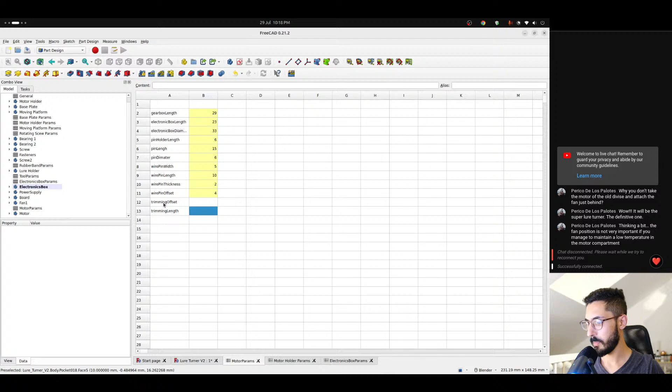So yeah, I was talking about that trimming at around 5.4 mil, and I think somewhere here we have a trimming length of 12. So we need to add this to our motor params. Let's call this trimming offset and trimming length. Trimming length is right here, it's 12, and the trimming offset is going to be 5.4 mil. So this is our offset, and that's our trimming length.

Cool, and now we need to go back to our motor, make it active. And we need a datum plane somewhere. Probably we'll start from here. Yeah, I think we're gonna do just that. So we have a datum plane here. We're gonna create a new plane, attach it to it, and in the Z direction, we need to go by pin length. Cool.

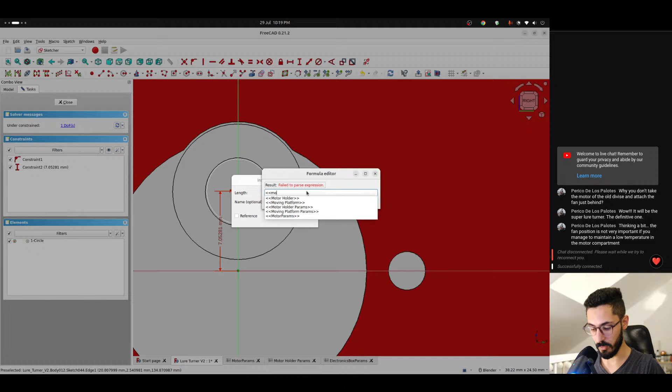Cool, and now we can create sketch here, go to section view, and let's do that trimming. So let's assume we have a circle here. We can just redraw the original pin. This was called motor holder params.pin offset. And this was motor params.pin diameter. Okay, and now I'm gonna set this as construction geometry.

Pex Peppers asks, how does FreeCAD compare to, say, Fusion 360 in terms of ease of use?

At the moment, it's not easy to use compared to Fusion 360. So yeah, if you put the time and effort to learn it, you could do stuff. I mean, I'm doing stuff with it, no problem. But they're working on version 1 that should be released soon. They don't have a release date yet, but if you go to FreeCAD, what was it called, releases or something? Oh come on.

FreeCAD releases on Google. Yeah, you can see the release notes for version 1.0, which is again not released yet. And I don't know why it opens in Arabic for some reason here, but everything else is in English. It will tell you here that it's under development. There is no expected release date yet. You can download it and install it, but it's not a stable software yet. However, version 1.0 introduced lots of ease of use features. So it's getting closer and closer to Fusion 360, but it's not there yet.

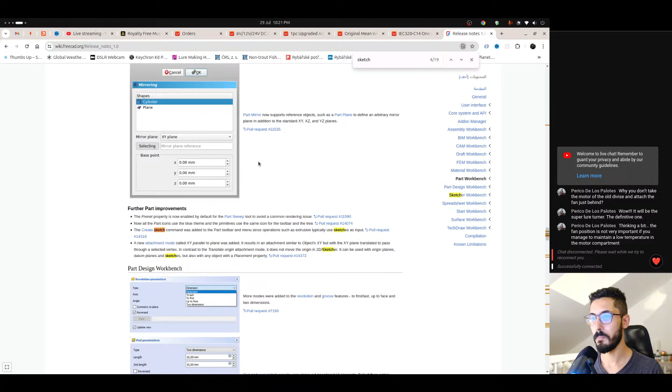So yeah, they added lots of stuff, especially to, I think, Sketcher. Where is it? Sketcher, somewhere here. We can probably search for it. Sketcher Workbench. So they added lots of stuff which was missing. Like for example, the dimension tool, where you click D and you select anything, or 2 points for example, to enter the dimension between them. FreeCAD did not have this, now it's there. There are lots of stuff that they added, and you can see it's a really big list.

But we're still waiting for it, so hopefully we'll get it soon.

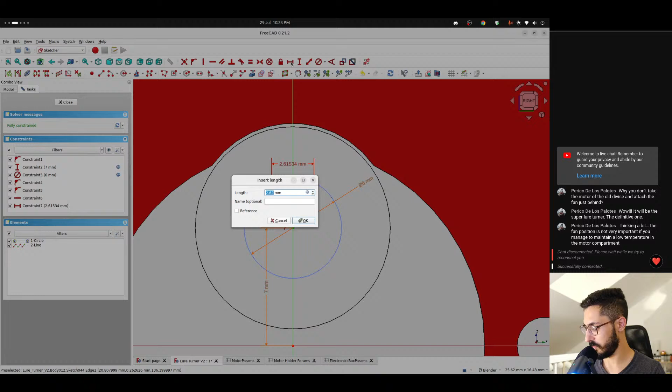This is interesting, trimming 5.4 mil. Okay wait, if we draw a line from here, or it doesn't matter, because we can just do this as I did. I'm gonna go with this. I think that's it. So this is not actually an offset. So the offset here, if this was an offset, would be like 0.6 because the diameter is 6. I'm gonna keep it called offset for now. And this is going to be the motor params dot... this will definitely change later once I know what it means.

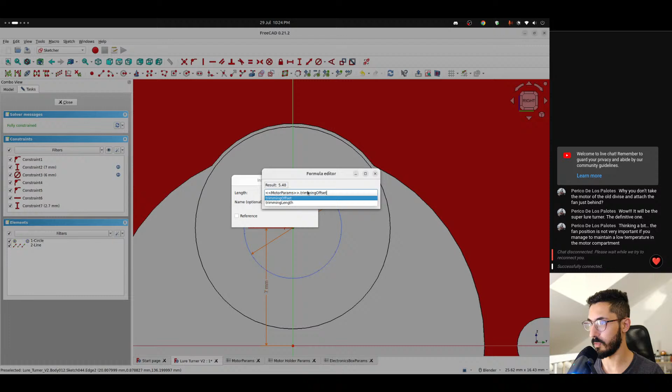But I'm gonna assume it's this for now. And then to cut, I am going to trim this. So if I get the trim tool, trim this, and then we're left with this, but I don't want it to be construction. Oh wait, it's not construction. Nice, so now I can use this sketch to pocket. And then how much do we want to pocket? This is motor params dot trimming length. But yeah, I don't know, does this look like this?

Maybe it does. I think it does, judging from this section right here. I think I nailed it.

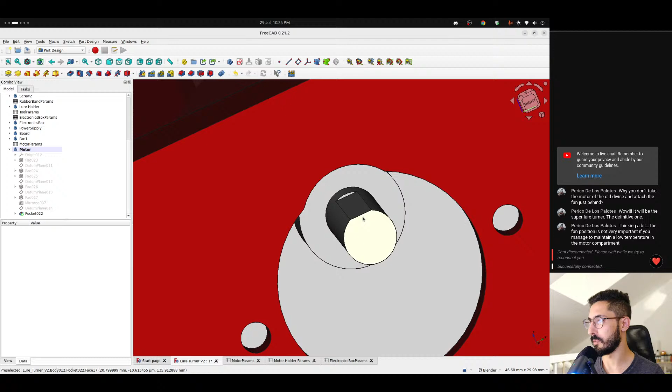Cool, so maybe this will help us put an attachment here to connect whatever is going to be between these two. I'm still thinking whether I'm going to leave it like that, where we just squish these two parts between the lure, or we're going to have something like a magnet bar we can attach the lure to.

I was telling you in the video that got cut off, that if you manage to lower the temperature in the motor compartment enough so it doesn't get hot, it doesn't matter where you put it. I think you're talking about the fan. I saw the comment, I don't know what happened to my internet connection, it just stopped my stream. You are right, it doesn't matter that much.

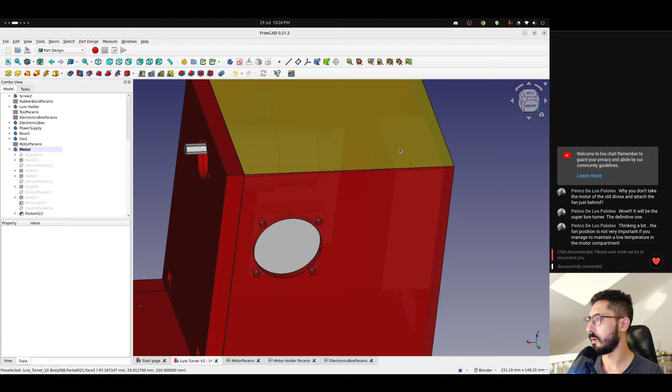It could be anywhere. And also, what was it called, the power supply is gonna have a fan of its own. Probably, I think it's gonna draw air from the inside and put it out from the back, so there's gonna be airflow going on, and everything I'm using is very low wattage, so it's not gonna generate that much heat anyways. So yeah, we're fine with the fan placement, and we're also fine using only one fan. We don't need more than one.

What else do we need to do? Okay, yeah, so we need to somehow... I need to decide what I need to do here.

Because what I have in mind so far won't work for everything. What I have in mind is we're gonna have something similar to this on this side, and then squish the lure in the middle, and then it's gonna start rotating. However, there's a problem with that: what if you're doing a two-piece lure you haven't assembled yet, like a two-piece swim bait? Then you can't squish it because it doesn't have a line tie and a hook hanger. Or what if you're doing a lure with a deep diver where the line tie is in the middle of the lip? It will not work.

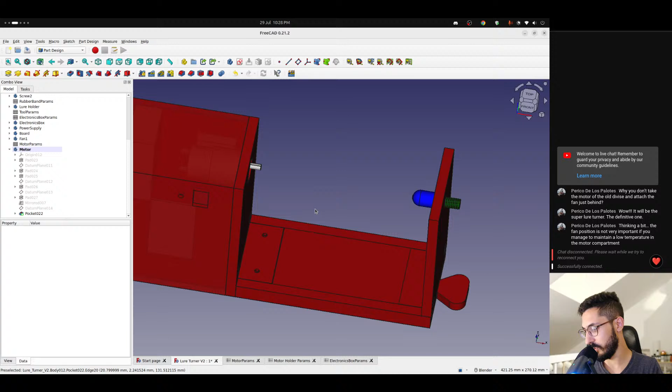Excuse me for the question, how tall is the device? So we can change that whenever we want. I can go here to general. The height is 150 at the moment, but I can make it like 250. I hope it doesn't crash, I should have saved.

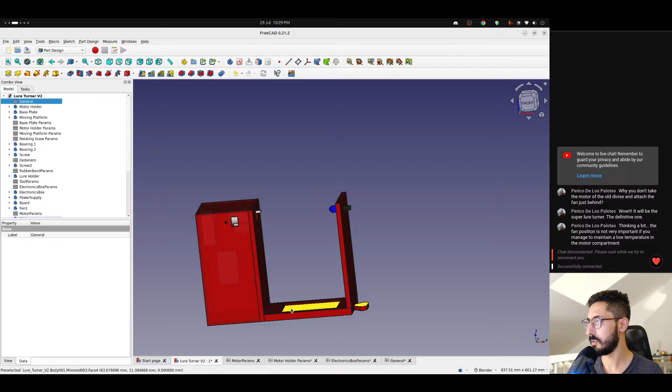But yeah, we can do that. So I'm not too worried about the width, height, and everything. Every single parameter can be changed, so yeah, I'm not too worried about it. These are just numbers at the moment.

Yeah, so we can make it wider, we can make it taller. And what did I do? Oh, I changed the width. What was this? This is 150.

So, I think we need to make it tall, and then we can have a bar going from here, and we can attach stuff to it. Or we can make a cylinder, a cylindrical thing on two sides. We can have a cylindrical thing on two sides with... no, this will not work. For that to work, this has to be fixed in its place, and it's not.

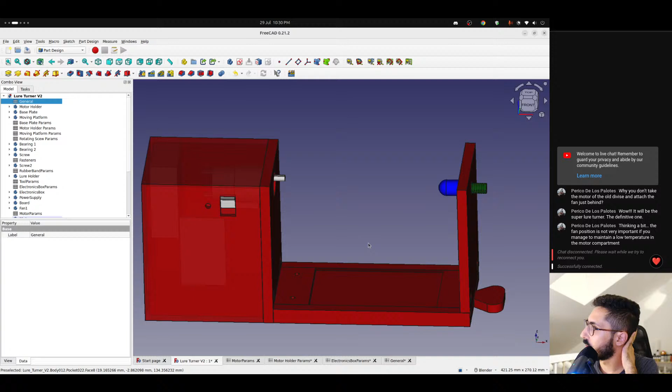So I think the bar is gonna be a better idea, and imagine having two, like one bar here, another bar here, and maybe even a third bar here. That would be amazing, so you can put as many lures as you want, or only one with a long bar. But the problem is the limit of 3D printers, like mine for example can only print up to 250 mil unless you do it diagonally across the bed. You could print something like 300 mil, but I don't think you can do more.

So this is probably gonna have a couple. We're gonna get rid of this mouse ear. Anyway, so let's hide this. What was this called? Lure holder.

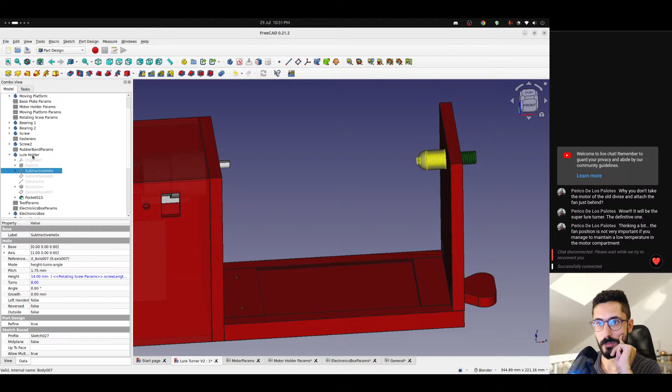Let's hide this, but before we hide it, how did I do this subtractive helix? Probably need some info from it. Subtractive helix. Let's hide it and let's somehow get something similar to this in here.

Oh wait, we have a problem. When I modeled this, when I basically modeled everything in here, I was under the impression that this part is gonna be in the center of the motor, but this motor is a bit different, it's offset a bit. So what I can do is either lower the motor down or raise this up, which I think I'm gonna raise this. Let's see how easy it is.

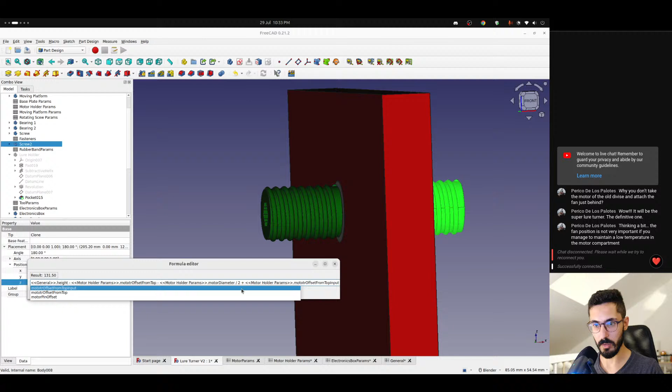So right here we need to start adding, for example, plus motor holder params dot, I think motor pin offset is what we called it, and then we can start raising them up.

Hooks in the side, a magnet, a bar slide to the side. It's one of the most interesting things, yeah, exactly.

I think this is what I'm gonna do here also. So you see this screw, I'm gonna also do a similar screw on this part, and then we can basically start working on attachments, and then you guys, for example, can create your own attachments.

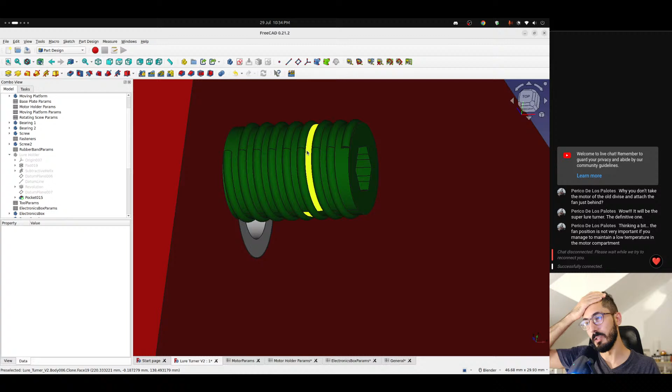So this is what we're gonna do. The only difference between this and the older one is the threads. On the older one, I think I was using actual threads, but they don't print that well. And now I'm experimenting with these types of threads, like custom made.

But let's see. This is all just prototyping and design at the moment, so anything can change in the future once I actually start printing and assembling.

Motor holder params dot motor pin offset. I should probably copy it because I'm gonna write it in lots of places. So let's copy that.

Bearings, the same. We're gonna change the Z value for this one. Bearing 2, same.

So the bearings are up now. Now we need to move these holes, that's in the moving platform.

Oh man. What are these binders? Interesting. Pocket, what is this sketch? That's one. So open that sketch right here.

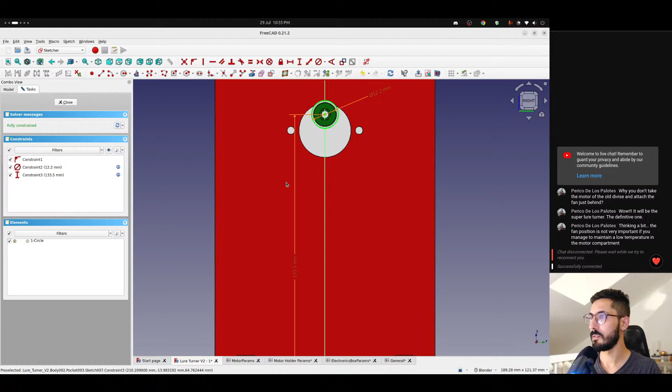Let's add this. Okay, close. That's one.

Let me hide the screws and the bearings because we have another problem. There's a pad here. I think it's this one.

We're gonna add to it also the offset. And this should be all.

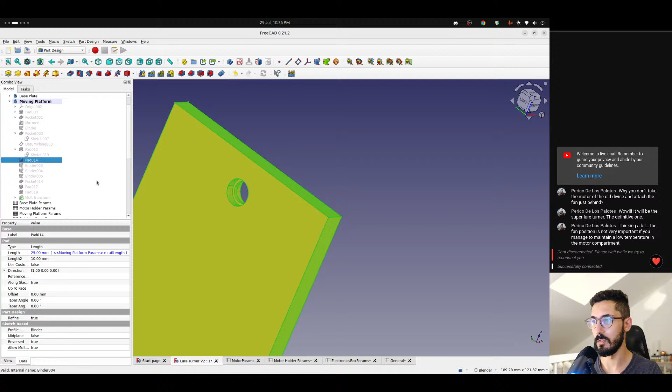Anything else? Like here, okay, what is this? This is the same. And then we did here, here, multi-transform. Okay, cool.

Now we can show these. Lure holder, no, we don't need it, but just for now, let me also fix it, because why not?

Screw, bearing. Now they are in place. Now they should be exactly in line with this.

Are they though? I think they are, because we have a notch at the top. Should be somewhere up here. Let's trust the math for now.

Okay, let's see this screw here. Can we reuse it? What does it look like on the inside? It's just a...

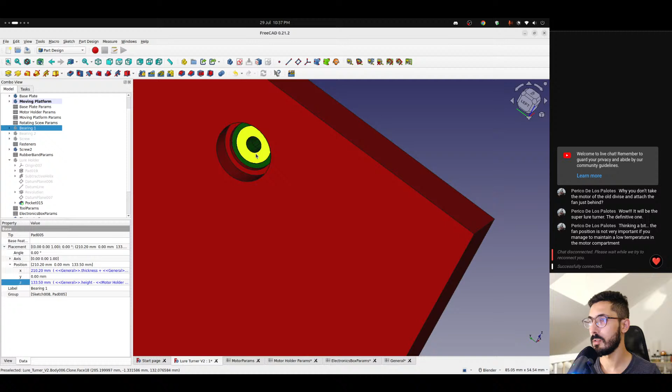No, I don't think we can reuse it. Or actually, I think we can. Wait, because I don't feel like remodeling it from the start.

So if I go to part design and then I clone this, it's gonna be this body right here. So this had an X position that we can copy.

And then we can go to the new body and we can do the negative of it. And then where are we gonna end up? Interesting. We are going to end up, oh, okay, so right at the beginning, like at 0.

So now I wanna add to this. Okay, wait, no, don't add to it. Let's remove the thickness.

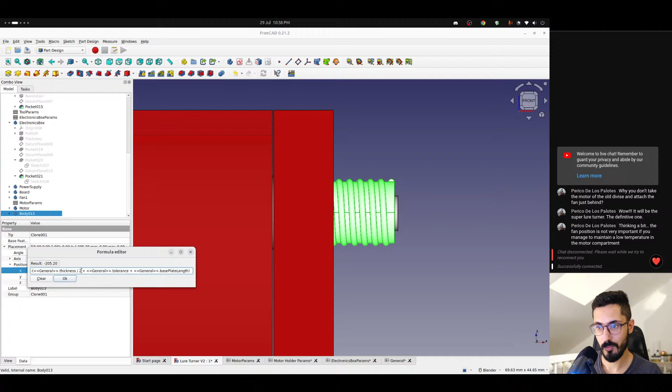Minus thickness divided by 2. That's an interesting... But it works for some reason, so I'm gonna leave it.

If we add the thickness, then we're gonna start from here. Basically, we're gonna start from right here. Okay, no, I think I got it.

So let's go back to 0. Okay, and let's hide the motor holder and just look at the motor. So now we are right here.

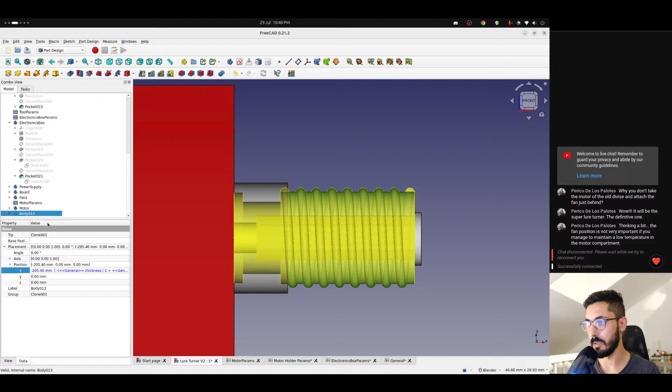We need to go back by another tolerance. So we're gonna multiply the tolerance by 2 and then we're gonna be exactly at this line right here.

So I wanna add to this. Oh wait, but now what's gonna be body right here? What's gonna be this value is our, yeah, it's called, so plus motor params dot pin holder

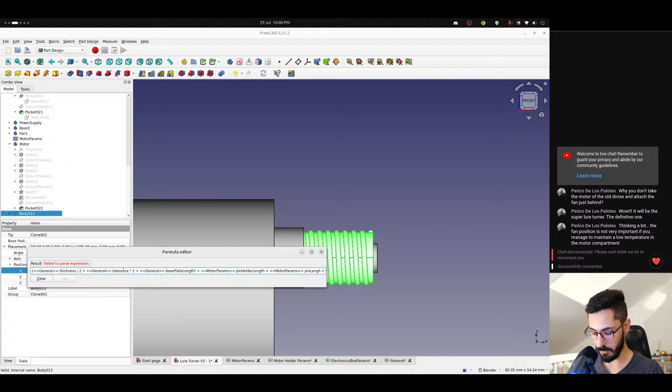length, plus motor params dot pin length, plus or minus motor params dot, what did I call it?

Trimming. Oh wait, I have to retype it. Come on.

Motor params dot pin holder length plus motor params dot pin length minus motor params dot trimming length.

So now if I take this and let's enable transparency so we can see like on the inside what's going on.

So we have a trimming here, and this is exactly on the trimming, but I want to move it by an offset. So going back to this value, I want to move it by a tolerance, right?

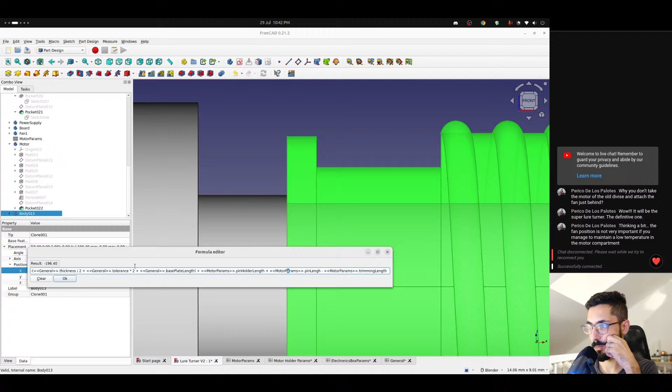So here we don't need to multiply by 2. Actually, yeah, okay, cool, cool.

Now we have a tolerance also included. So now what we need to do is

I'm gonna get rid of whatever we have here on the internals and right here, whatever we have here, because these are meant for like the bearings and stuff, but I want to reuse this, so that's why I cloned it, and now I'm gonna start modifying it.

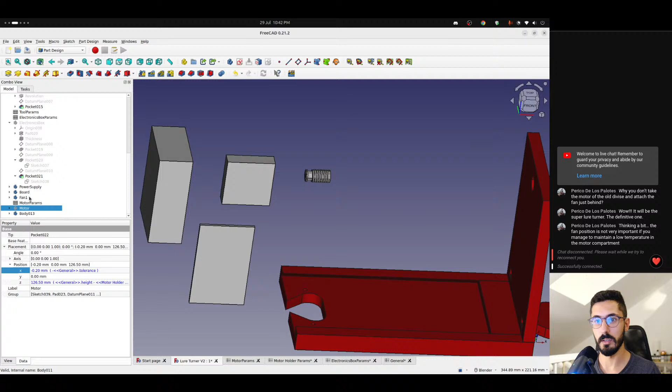So let's hide the motor. Let's keep this part, and let's hide the fan, board, power supply, moving platform, base plate. I don't need all of this.

Let's isolate this. Cool. The first thing I'm gonna do is, first of all, where's the origin for this object? Oh no, why is it like that? It shouldn't be like that.

That's very interesting. That's probably because of the cloning. That's gonna be a mess.

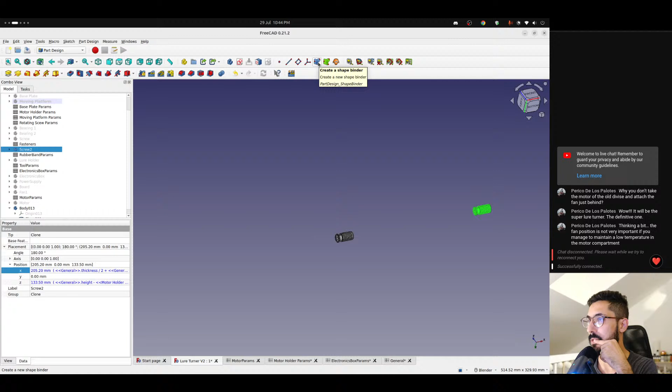That is going to be a mess. Let's see if we can do anything about this. So I'm gonna show the screw again. Screw 2, I think, yeah. How can we clone this but without creating a new shape binder? Subshape binder. Like if I created a new body, and then I click the screw and create a shape binder. Click OK. Where is this body now? No, it's the same issue. The origin is here and the body is here. So that's not a solution.

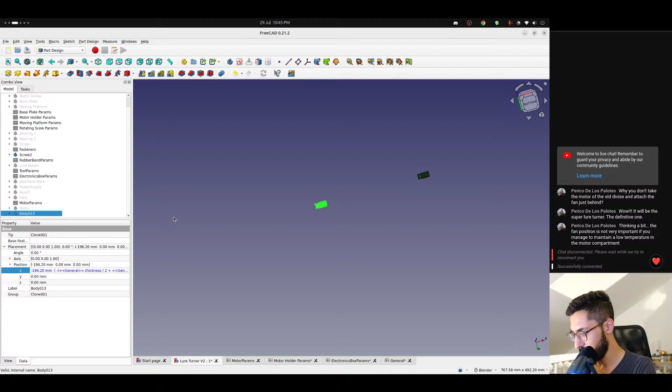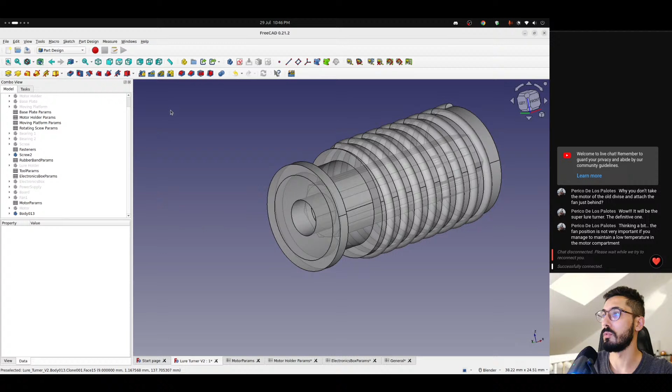Was something... the old thread works perfectly. Yeah, it works perfectly. You mean with what? With the parts I printed, or the printed parts? Yes, it would work. But this will work much better if you're using my printed files. Because it's gonna print nicer, you're not gonna have print issues. If you don't have much cooling in the printer, like if you have a cheap printer, you should be able to print these far better than the old ones. But again, I still haven't tested these, so I might revert back to the old threads. Also because I'm currently using different software than before, so threads here are a bit different than in the other software. I don't know yet how to do them, that's why I did these custom threads.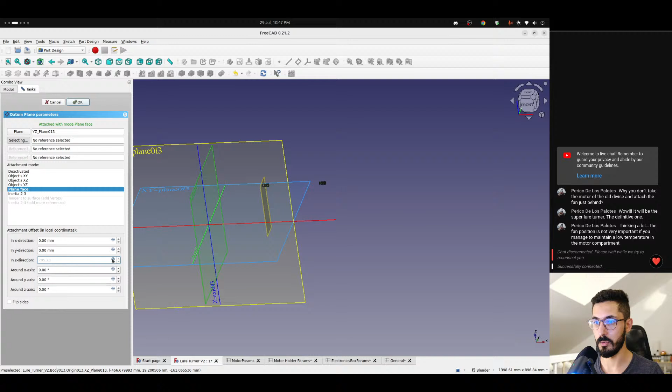Yeah, so the biggest issue now is the origin. Let me see how I can fix that. If I can get one datum plane up here, then we can work. So wait, let's see. I think this is how it's gonna be. If I copy this and then create a datum plane, so we need to mark this as active, create a datum plane, attach it to this, and then in the Z direction we can move it by this amount. It should be exactly here.

Now in Y direction it will go which way? I think X is what I want. That is interesting, does nothing. Y is which way? Let's set it to some value like 26, I want to see what happens. What will happen when I create a sketch here? Okay, so it moved up. So this is what we want, Y.

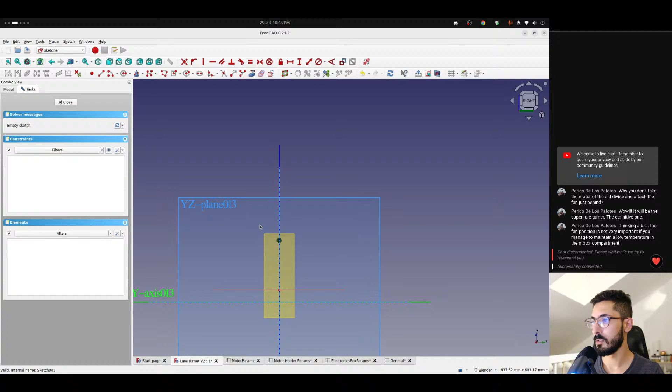So I'm gonna click the datum plane, and in Y direction it should be general dot height minus, not general, motor holder params dot motor diameter divided by 2, minus motor holder params dot motor offset from top. And I also need to add to that the motor holder params dot pin offset. So now if I create a sketch, where is it gonna be? Wait, what? Okay, cool, the origin is gonna be right here. Nice, okay, problem solved. We're gonna use datum planes.

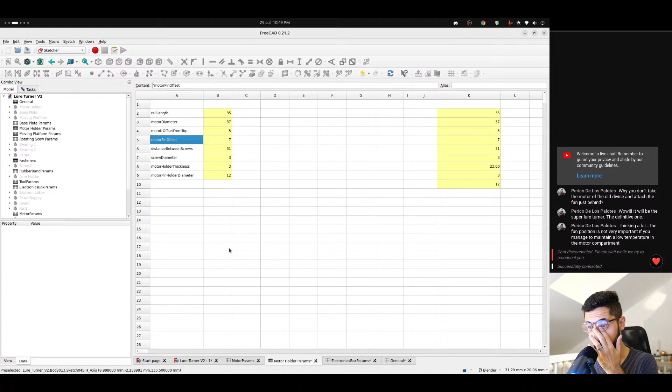And let's see, the first thing I'm gonna do, let me hide that screw, is I need to cover up whatever is on the inside of this. So I have this hex screw, I think that's like the biggest thing on the inside. So I'm gonna create a circle to cover this hex. And the value for this hex is somewhere here. Is it in fasteners? I think, yeah, I think it's in fasteners, nut width.

So how do we do this? We can do a... where is it? Hexagon. And then if we take the distance between this and this, from fasteners dot nut width, this is not correct. Why is it not correct?

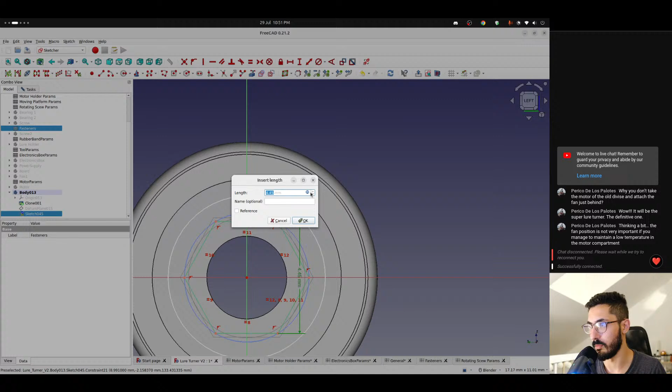Tool parameters, rubber band parameters, rotating screw params, screw length, thread turns, bearing tolerance, bearing width. No. Is it the nut height? No, it shouldn't be. Oh, we need tolerance, oh my god I feel dumb. Plus, is it general though? Is it the general tolerance or do we have tolerance here? I think it is the general tolerance, so I'm gonna use the general tolerance, multiplied by 2.

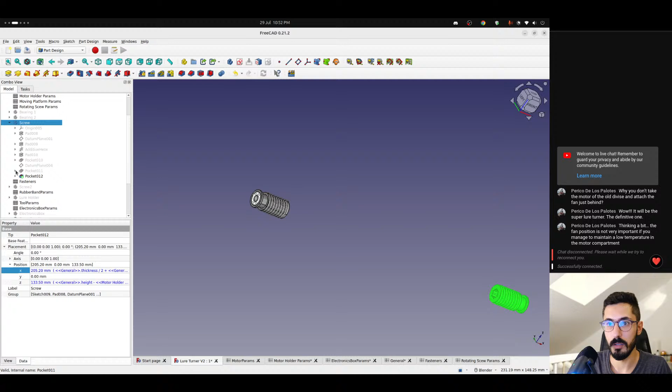Okay, there is a way to find out. So we're gonna go to screw number 2. Screw number 2 is a clone, so we clone the clone. Nice, screw number 1. Let's see. What do you have? This is, I think... yeah, that's it here. What is you? Fasteners dot nut width plus fasteners dot tolerance. Okay cool, that's what we want. So here we want... nurse, come on. Okay, that's it, so I don't need this anyways.

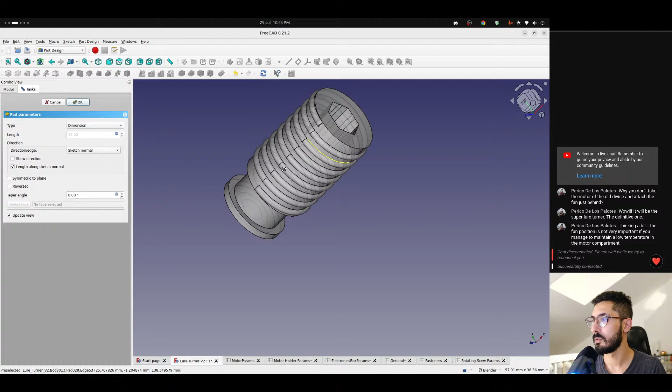This one and this one are coincident. Nice. So what I want to do is make all of these construction geometry and this one not a construction geometry. Cool. So now I'm gonna pad this all the way through. Now here's a cool thing. How much? I think it was rotating screw params dot screw length. Is it? No, it's not. Diameter, bearing width, bearing tolerance, screw length. Okay, so back to screw. How much is it? Interesting.

So it's screw length.

Thickness divided by 2 minus bearing width.

Oh wait, I think what we can do is we don't even need a value here, right? Because instead of dimension, we can do to last.

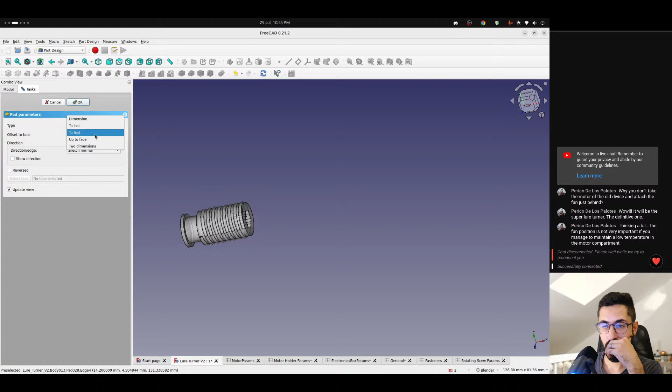No faces found in this direction. Is it reversed? No, it's not finding anything. Now we can do up to face and select this one, but this is not parametric. And for some reason it's not covering the entire thing.

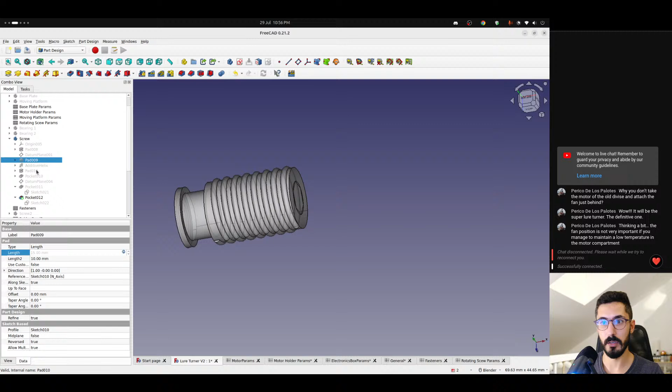Okay, let's do this the correct way. So we have thickness plus 2 divided by 2, sorry, plus tolerance. So let's put it here. Okay, or wait, come on. Plus rotating screw parameters dot screw length. Where is it here? Rotating screw params dot screw length and this thing right here. So that's plus this, right?

Wrong. It's only the first one.

Okay, and here transparency 0%. What is going on here? Okay, it's fully closed, but we have these weird faces. That's fine, it's not gonna look like that. But wait, can we do refinement here? I think we can. Oh, it's already set to true. But for some reason it did not merge these faces together. Anyways.

Anyhow, what we also need to do is remove this bearing slot here. So we're gonna do something similar, which is thickness divided by 2.

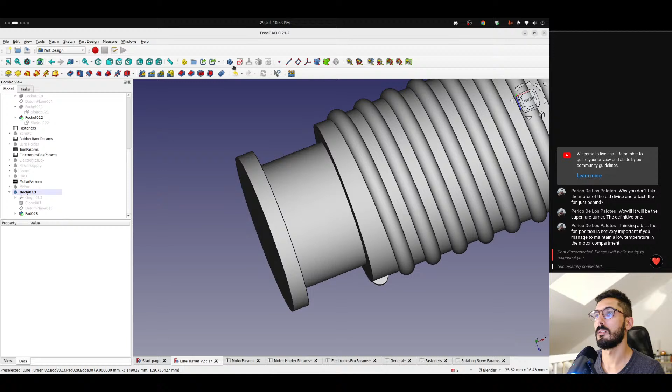I'm going to create a sketch on this datum plane. Create a circle that should be the screw diameter, right? So rotating screw params dot screw, no, I think it's just diameter. Interesting. Why is diameter?

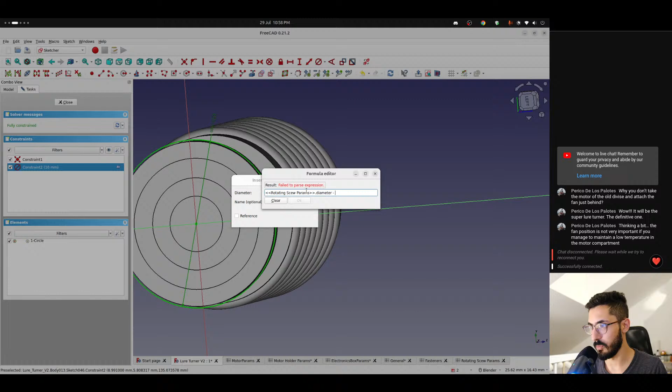Is it because of the tolerance? So if I remove... no, do we have a tolerance here? We have a bearing tolerance. I'm getting confused, my own design is confusing me. This should be diameter, but it's not for some reason. For some reason. What are you? Yeah, it's bearing tolerance, why was I doing this?

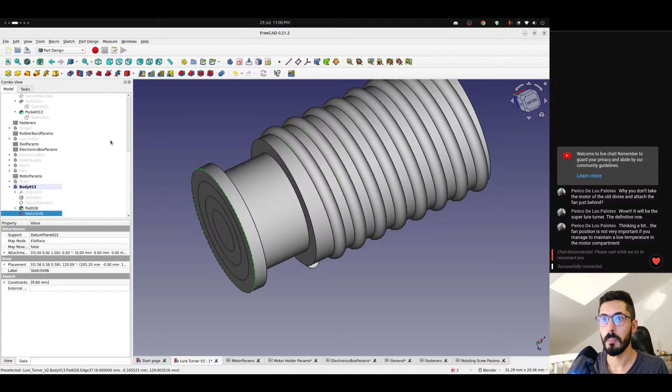No, so that's minus. I had some very weird design decisions made. Anyhow, we want to pad this by, what is the amount? What is the amount? Going back here, let's see.

So this one is thickness divided by 2 with the tolerance, and then I don't care about this one. So we have this. What about this? I think this is the one.

So now if I pad this, it's going to be general dot thickness divided by 2 plus general dot tolerance plus this value right here, I think.

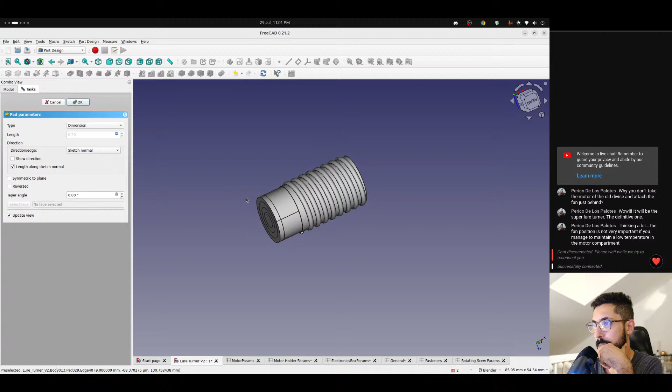So basically we remove the division by 2. Is this it? Huh. Interesting.

So we're using a different tolerance here than here. Wow. Wow. I'm gonna, anyways, what I think I'm gonna do is go back to this sketch.

And what if I used, let me see what happens if I use like the general tolerance. Now it's smaller. What? Oh yeah, yeah, right, not the general one.

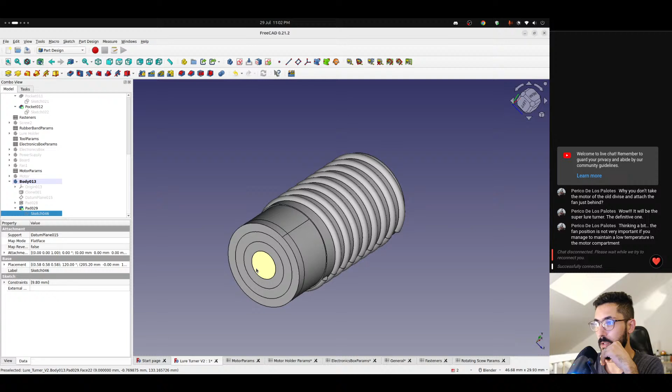I'm gonna leave it like this for now. I'm just gonna leave it like this. And now I wanna cut here the slot. So we're gonna create a sketch, and we are going to create a circle.

This is going to be the motor holder params. No, motor params pin diameter. But I'm gonna add tolerance, so general dot tolerance multiplied by 2, and this is gonna be a slot that will accept the pin. It's quite big.

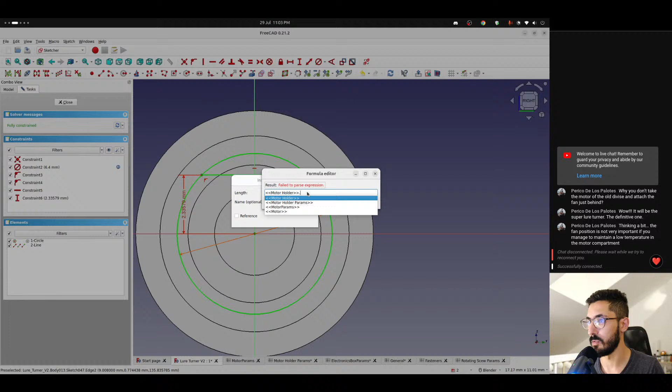And we also need the trimming here, so from here to here. This used to be motor holder plus trimming. No, motor params pin diameter divided by 2 minus... no, okay, I think I got it.

This used to be the trimming offset, which is a bit confusing, but that's fine, divided by 2. And then since this is a cutout, we need to add a tolerance. We'll see how it looks in a bit.

So now, oh wait, I need to trim the upper section. Okay. So now I can pocket this. Probably reversed, okay it's reversed. Nice. And how much do we want to pocket?

This is going to be the motor params dot pin length minus motor params dot trimming length. No, that's not it, I don't know why I did that. That's stupid. It's just trimming length plus a tolerance.

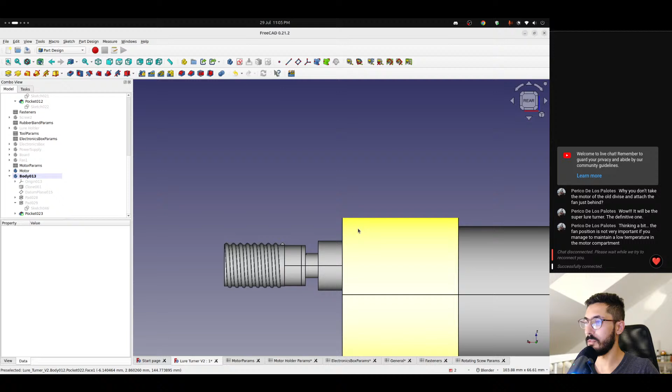Okay, now we're good. So if we show the motor now, let's just make it right. Okay, cool. So if we show the motor now, and I'm gonna take this body to view, increase the transparency so we can see through it.

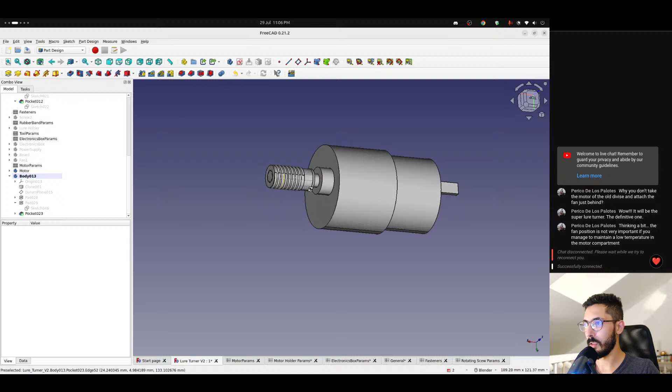We can see how this pin will go in with an offset, and it's gonna fit right in it. Now we should probably keep it in place somehow, because I don't think we should glue it here. That will make it irreplaceable, so I'll figure something out.

So we don't need this lure holder, that's what we said. We should probably rename this to screw 3, so now we have 3 screws. And this has to be green. I think it was this color. I don't remember, yeah.

Okay, cool. Lure holder, no. Screw, bearing 1, bearing 2, moving platform, base plate. Nice.

Still don't know what to do with these. So what I was thinking was something like this. Where was it? These. No, I accidentally ordered the fancy stuff by mistake. That's my bad.

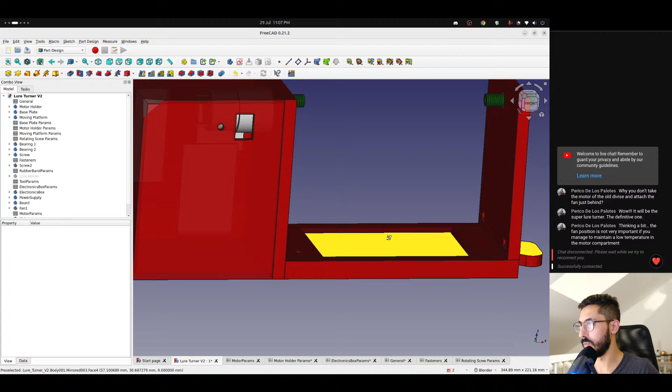But these are like tensioning springs. I was thinking we can attach this to this using 2 springs, and then we have whatever it is attached here. But I don't think this is necessary anymore. I don't know, too many design decisions to make.

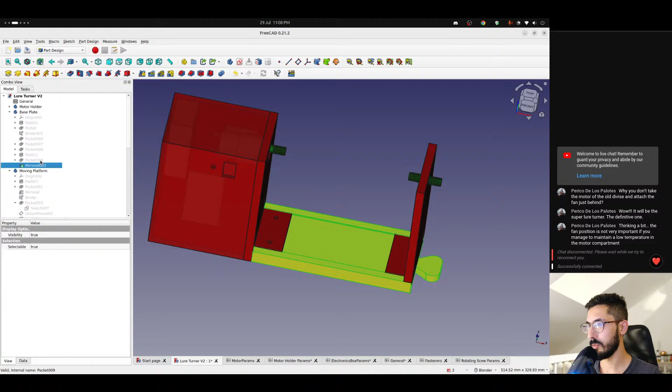What I am sure of is I don't like this. I don't like this at all. So I think let's remove it right now because it looks so bad. What is this mirrored? Wait, what did I mirror here? Base plate, motor holder.

Interesting. Pocket, it's this sketch right here. Oh okay, yeah I think I remember. This is related to the thing I'm removing. Pad. Pocket. Okay, and then another pocket. Nice. That's how it used to look like.

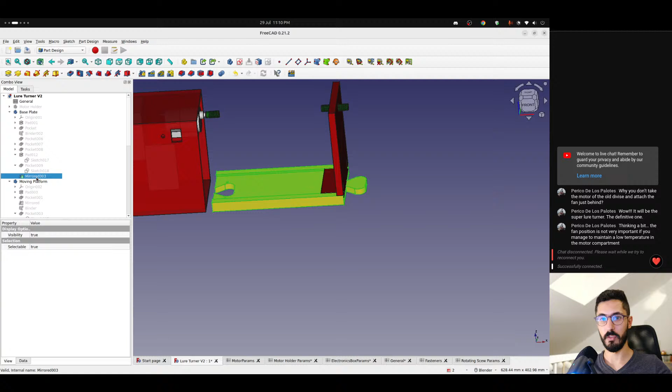But now we need a different way to attach two of these platforms together, because I'm worried that the previous way I had isn't going to work well. At least the way it is at the moment, because it's gonna hold it in place if there's force along this axis, but if there's tilt like that, it's not gonna hold it in place.

So one way is to keep this and then insert a pin from this side. Maybe that's a good idea. Maybe we can keep it and insert a pin. This pin could be like a steel wire, or it could be another 3D printed piece.

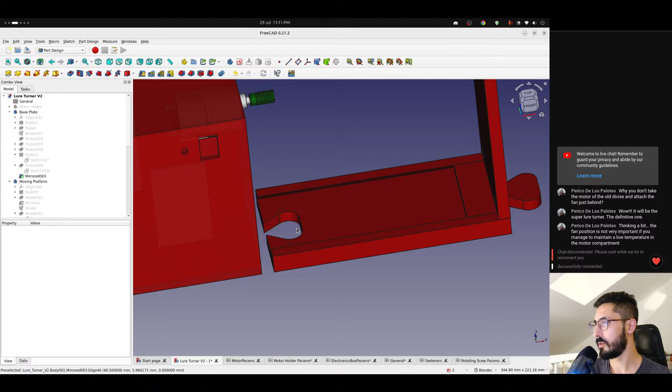However, we do have something here that we need to stay away from, these two holes. We can insert the pin from this side, or from here at the end. Should work. Should work. Yeah, I think I'm gonna do that. I'm gonna leave it, I changed my mind again.

Thick enough to put something. I'm gonna go with, so this is in the base plate. Where's the base plate? Base plate params. Connector, so here we have the connectors. And then we need, let's do pin. So it's gonna be like a rectangular pin, that's the easiest to print.

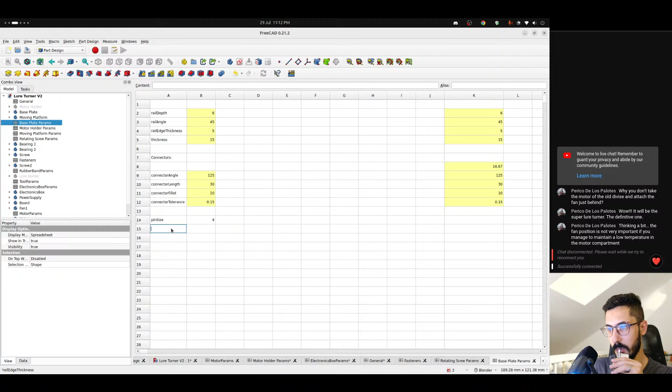Let's just do pin size and make it a square pin. Oh come on, it's gonna take a while. Pin size. I'm gonna go for something like 4 for now. And then I'm gonna give it its own tolerance, like pin tolerance. Or no, we're gonna use the general tolerance. So pin size, and I guess that's it.

Come on, it's lagging a bit. Cool. Oh, and pin offset, I think. Let's also do 4.

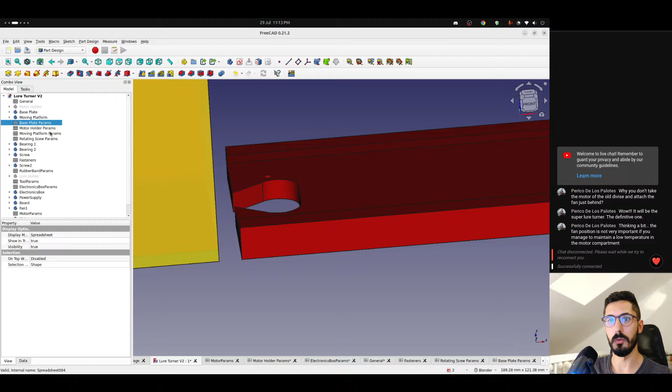So how will it look like? Let's see, from the front, I'm going to create a sketch on this plane. Something like this, and then we're gonna create a pin right here. Something like that. So from the bottom, or sorry, from the left, the distance is going to be baseplate params dot pin offset.

So that's how much material we want on this side. And then we're gonna make these two equal, so basically we're making it a square. And then this is going to be baseplate params dot pin size. Probably too big, I might make it 3 mil.

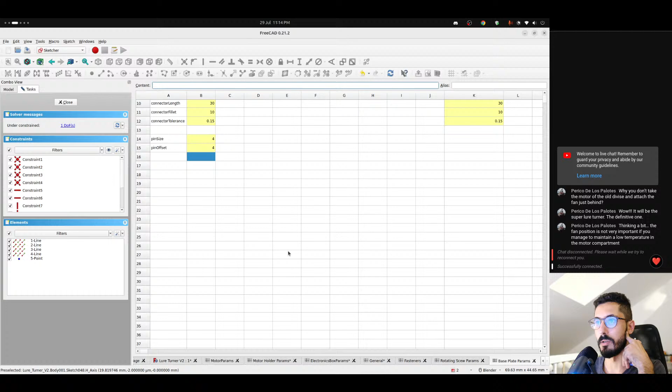So that's right here, but then how do we put this in the center of that? This should be, what is the height of this? Base plate params, rail depth, thickness. So I think it's thickness, which is 15, minus rail depth is like the height, because this is the entire thickness and this is the depth.

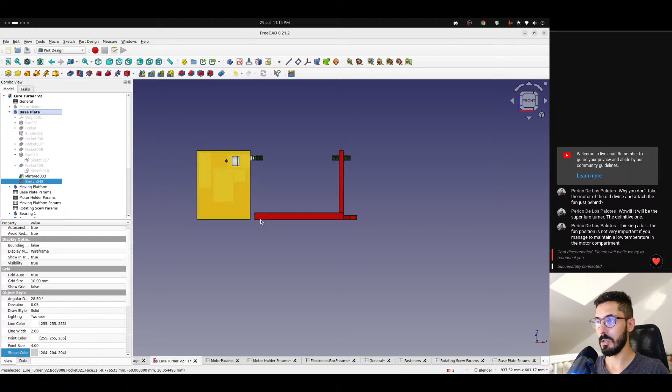So if we take the vertical distance, it's going to be baseplate params dot thickness minus baseplate params dot rail depth. And then if we divide the entire value by 2 - oh wait, I did the distance to this edge. So I'm gonna copy this, copy, delete this, and then we're gonna do it to the center instead. Vertical distance. Okay, now it's centered. And now if we close this, we can pocket it.

We're gonna do through all and then symmetric. So this is gonna create a pocket all around it. But thinking about this now, we also need tolerance, right? So we are going to use the general tolerance. Yeah, I think I'm gonna make it, as I said, 3 mil.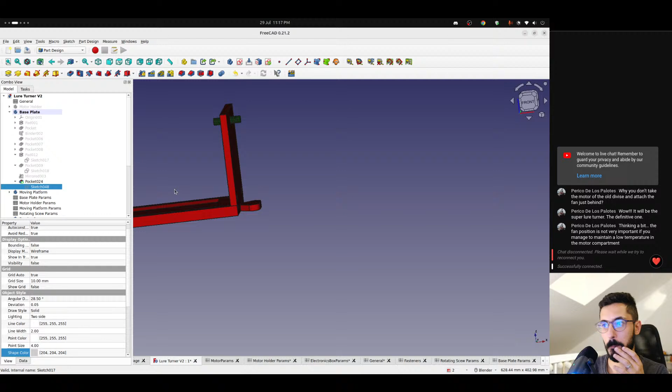Nice, and now we need to also cut this side right here. So to do that, we should probably - I think we already have a datum plane here somewhere. No? Binder. No, we don't. So we need to create a datum plane.

Sorry, cancel. Yeah, create a datum plane, attach it to this plane in the Z direction. It's going to be - is it in the base plate params? No, it should be in general. Nice, I think that's it. Yes, that's exactly where it should be.

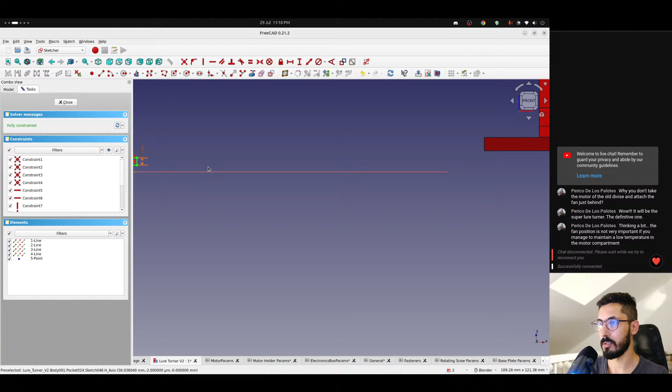And now we can do the same. Oh wait, no, I don't need a datum plane. But it's good to know that it's general.length. So if I go to the same sketch, I can draw another one here, or I can do a pattern.

So if we go to the lattice workbench, create a linear array. Oh come on, okay, now create a linear array. Where is it? Cool, it's right here. So go to the top, let's look at it. So it's starting from here, let me hide some stuff.

Electronic box, power supply, board, fan, motor, screws. We only need this at the moment.

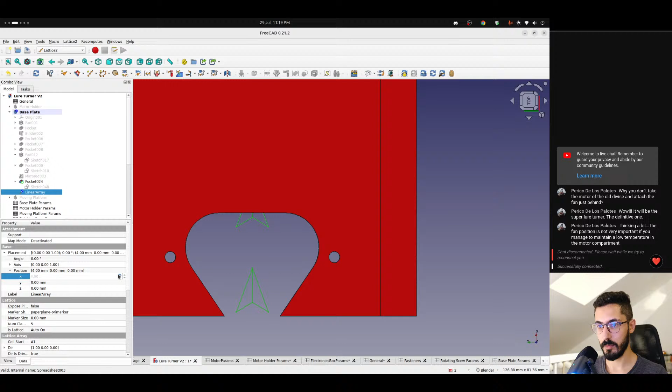It's going to start from, so in the placement position, x-axis, we can move it. This is going to be baseplate params dot pin offset. Basically I want it to start from here, or let's make it start from the center. Doesn't matter, I think it should start from the center. So we need to also add baseplate params. Actually no, it doesn't matter. Never mind.

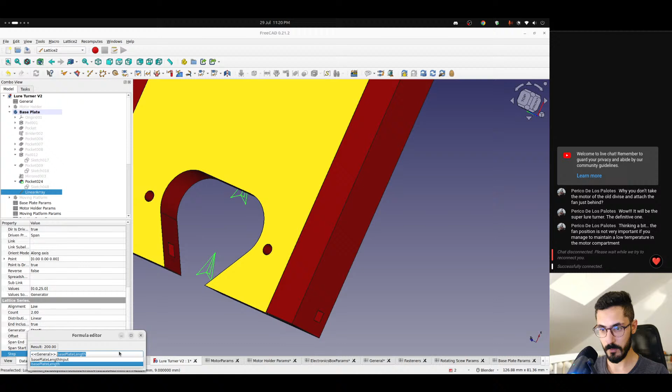Down here we need to go span end, or step n. Step n, and we need to change the count to 2, and then each step is going to be general.length. Baseplate length, was it? Yeah, so it starts here and then it ends. No, oh yeah, yeah no, that's fine.

That is fine. So now if I take the linear array and then the pocket, linear array and the pocket, and then we can do a part design pattern.

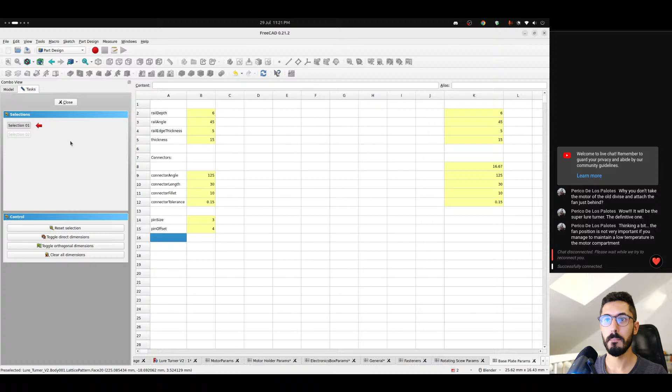Now we should have this hole right here exactly where it should be. And we can measure the distance, let's see, just to validate. So in part design we can measure the distance between this edge and this edge. It is exactly 4 mil, which is our offset, 4 mil. Cool.

Let's clear the measurement. Now it changed color for some reason. Why did it change color? I don't know. I'll check the color thing later.

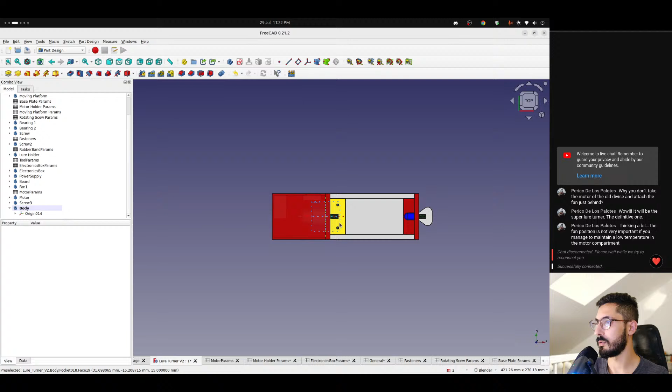Now we can create the pin. This should be very easy. So I'm gonna add a body. Let me see where this body is. I'm just gonna move it to the side.

In the Z, or sorry, in the Y direction, let's move it down. I want to move it by minus general.width divided by 2 plus 20. So it should, wait, what? Isn't it width? Should be width. Width is 100. Oh wait, minus 20, not plus 20. Okay yeah, that's it.

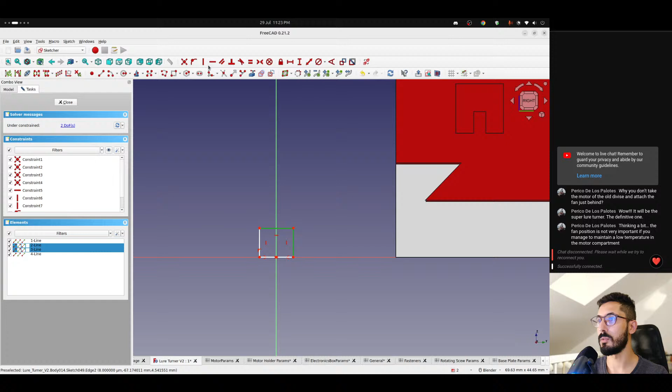Now I can create a sketch on this plane. Let's draw a rectangle. Let's make it symmetric to this line, these two should be equal. And the width is going to be baseplate params dot pin size. Now all I have to do is just pad it by general dot width. That's our pin.

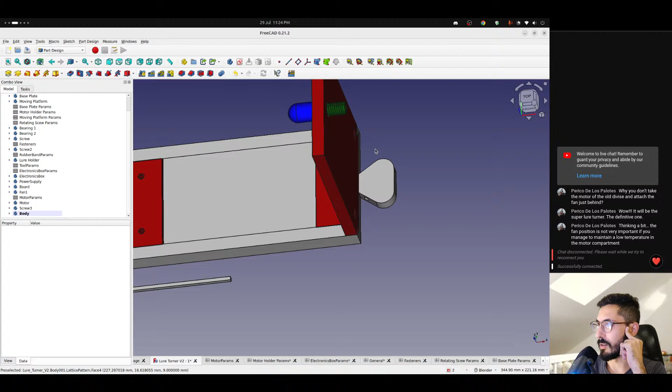So now we can print two of these. Use this, whatever it's called, like dovetail or something, I don't think it's called like that. Anyways, this joint, we can join them using this joint and then insert this pin to lock them in place. Should be stable enough, and we can use the tolerance to make it like a press fit or like a loose fit or something like that.

So we didn't do much today. All I did was model that screw. Oh, we modeled the motor. So we modeled the entire motor. We modeled this screw, we modeled this right here. And the cool thing about the screw is that now it's supposed to be parametric.

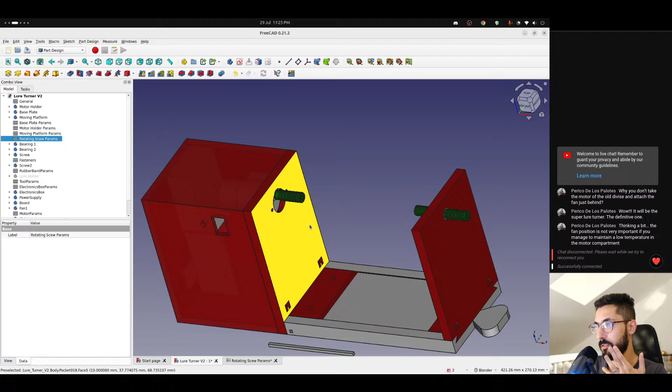Now let me save before I test that. But it's supposed to, when I go here to rotating screw params and maybe change the screw length to something like 25, give it a second to recalculate all the stuff, and it should be parametric. Yeah, now all of them are 25 mil.

This one, what is this? This screw, it has opacity, so let's turn off the transparency. Did it break anything? Sometimes this happens and I don't know why. Let's return it back to 15 where it was actually working. Yeah, as I said, I might change the threads.

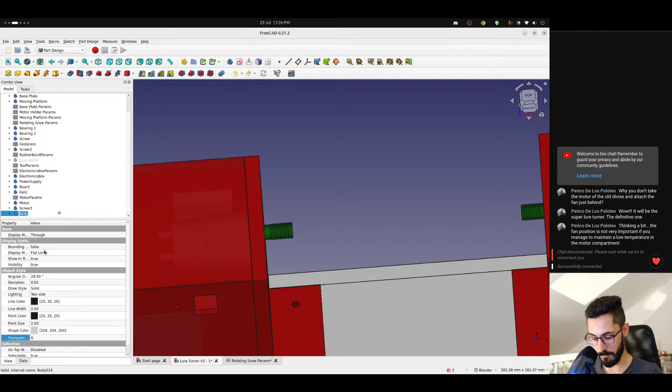So this body here, we're gonna call it base plate pin. And I think that's all for today.

Yeah, I can't do much without actually getting the hardware. So this project might have to wait till I get all the hardware from AliExpress, which could take time. It could take like a week or two. I think we're at the end of July. Next Monday would be August 5. I'm not sure if they will arrive before August 5, so we might have to wait till the next Monday or even this one, I don't know. We'll see, because I need to print some parts and test fit everything and see how it goes.

Then we can have another live stream where we do some modifications. But for now, that's it.